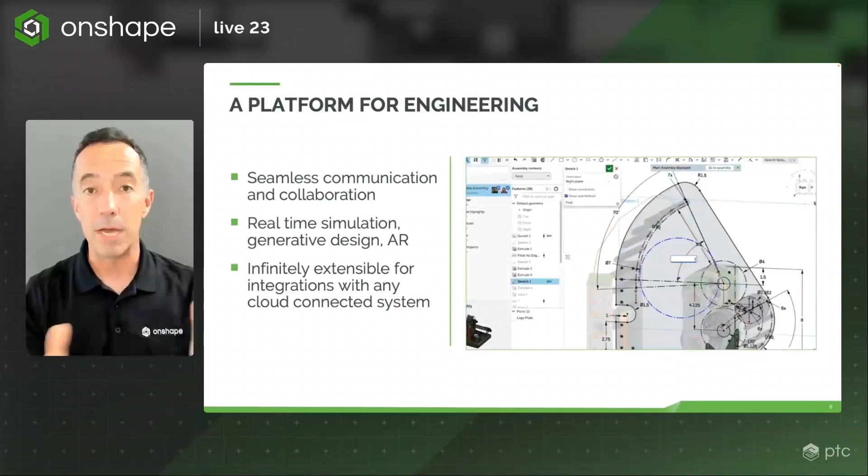But what I saw when I was a teacher is that it goes even beyond that. If you are creating a project of any complexity, or if you're doing research of any depth, you're quickly going to run into the constraints and boundaries of your CAD system. And so your designs end up getting constrained, and you end up having to adapt to your CAD system, because CAD systems, until something like Onshape, were not flexible or extensible. But because Onshape is so infinitely extensible and flexible, it adapts to you, not the other way around.

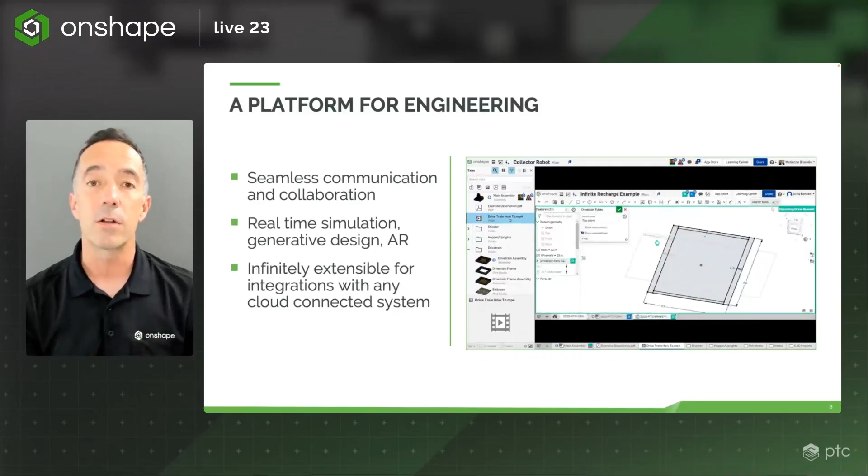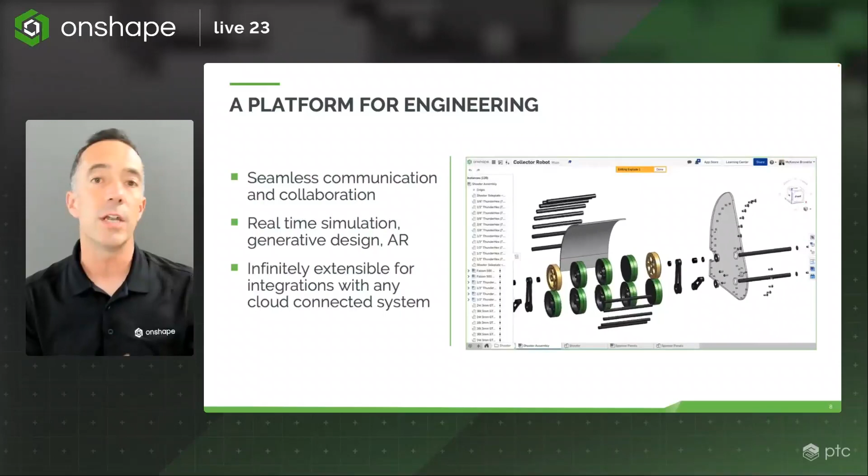And when my students got that, I really felt like their creativity was unleashed, because they understood that they weren't bound by the constraints of whatever CAD system was in front of them, that they could add to Onshape, they could find extra plugins, they could write or find extra scripts, and really it enabled a whole other level of creativity, of collaboration, and fun in the classroom.

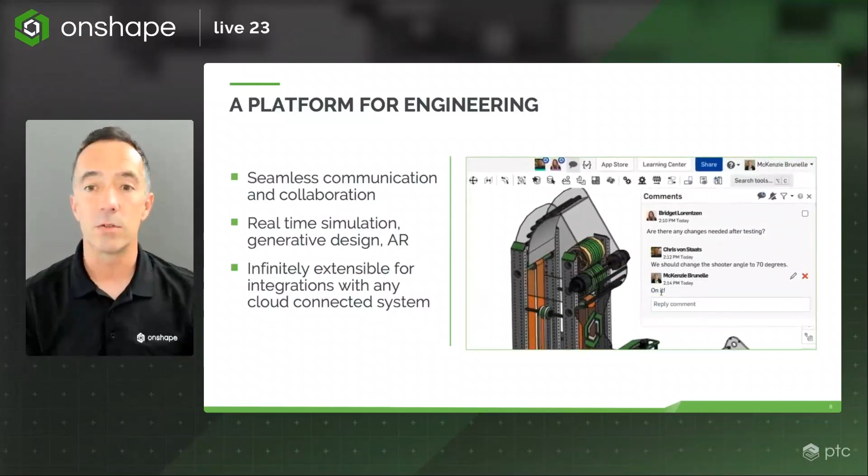So it's really cool to see a platform like Onshape that enables that kind of creativity, because it's so flexible and so extensible. So I'm going to turn it back over to Matt, and he's going to talk about some of the things under the hood that make that type of flexibility possible.

Thanks. So yes, I'm about to dive a little bit deeper into some of the core technologies that are really enabling this academic research and innovative teaching. So a first question that Onshape developers had to ask when they were building their platform was, how do you parametrically design 3D geometry in the cloud? Their answer to this question actually solved a couple of problems posed by traditional CAD platforms.

So let's say you're at the hardware store and they're out of the original material that you were hoping for. So you want to edit the model on your phone and update the bill of materials. In the past, traditional CAD platforms have been able to provide CAD viewers on your phone, so you can view and rotate your model, but you couldn't actually edit or interact much with your model from your mobile device.

Another scenario is you want to automate a common design workflow that your engineers are going to do over and over again, but you want to maintain a custom interface for parametric control. In the past, you could develop a macro to execute a series of canned tasks within your CAD platform, but you would not have a parametric interface for controlling this macro.

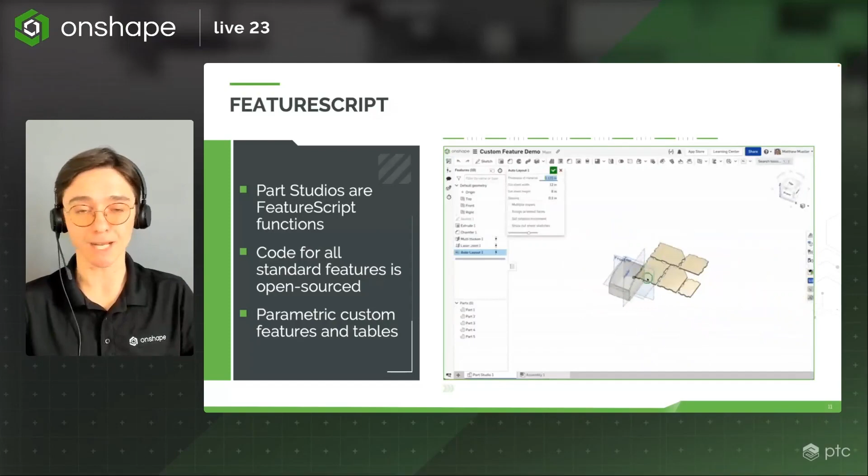One of my favorite things that you can do is now develop these custom parametric features and tables. So in this GIF on the right, you can see I have this 6-sided extruded shape, and with just 3 custom features, I can go from that extruded block into a flat packed box that's ready to send to my laser cutter and manufacture. And with each of these custom features, I also have a parametric interface to control, in this case, how many tabs there are on each face where they interact. So this is opening up a whole new world of how you can create your own first-class features in a CAD platform.

So a next question that Onshape developers asked was, how do you integrate CAD with other systems in real time? So one example use case is you want to pull a range of configurations with different parameters into a simulation and run that simulation to see the impact as you edit your model. So in the past, if you had a very powerful workstation, you would be able to do this, but there would still be a very manual process for data management where you would have to make sure as you edit your files, you're saving them and then reloading them into your simulation platform.

Another scenario is you want to integrate your CAD data with a project management tool. Jon Hirschtick this morning mentioned a number of examples like Airtable, Asana, Google Docs, that are all cloud-native project management tools. In the past, if you wanted to integrate your CAD data with those project management tools, it would, again, be a very manual task where you would have to upload any updates anytime you do them.

So Onshape's solution was the REST API. So if you're not familiar, a REST API is a standard HTTPS protocol that's used by pretty much all web applications. And it allows you to integrate any computational workflow, any workflow that's driven by code, directly into Onshape's modeling engine as well as database. So this allows you to, in real time, as engineers are working through the front end of Onshape, be running a Python script in the background that's doing any sort of data integrations or analysis or updating to organize your information, all in real time. So this is a hugely powerful part of Onshape that's opening up so much extensibility to make Onshape truly an engineering platform, so much more than just CAD.

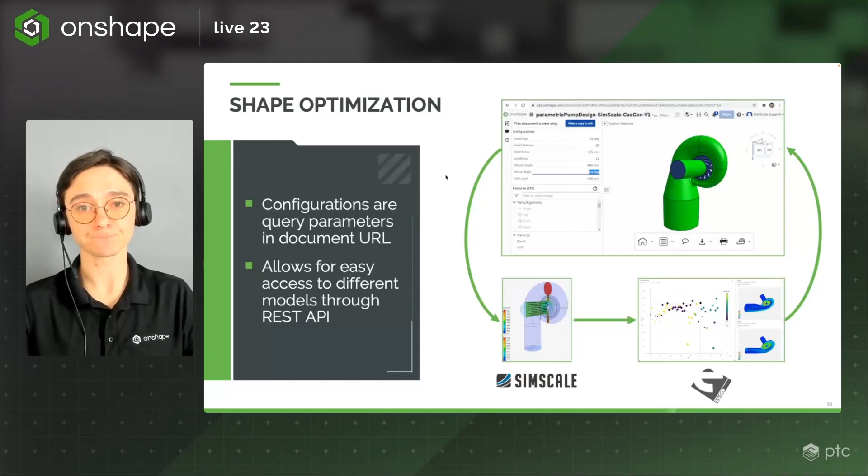But then you can change some parameters so that as the material is deformed in the y-axis, it also deforms in the x-axis with a negative Poisson's ratio. We worked with this student to develop a Python script to automate his process. This is a great quote where he says, using the Onshape REST API, I was able to cut my workflow from a very manual process on the order of hours to an automated and importantly rerunnable process of minutes. This lowers the costs of performing studies significantly and has vastly improved the fidelity of my investigations.

It's so exciting to see that Onshape is being used to grow knowledge in various communities. This was a great, fulfilling case where we were able to help a PhD student save lots of his valuable time. Moving on to the design process and education research community, this is a great example coming out of a collaboration between the University of Toronto and the Technion University in Israel.

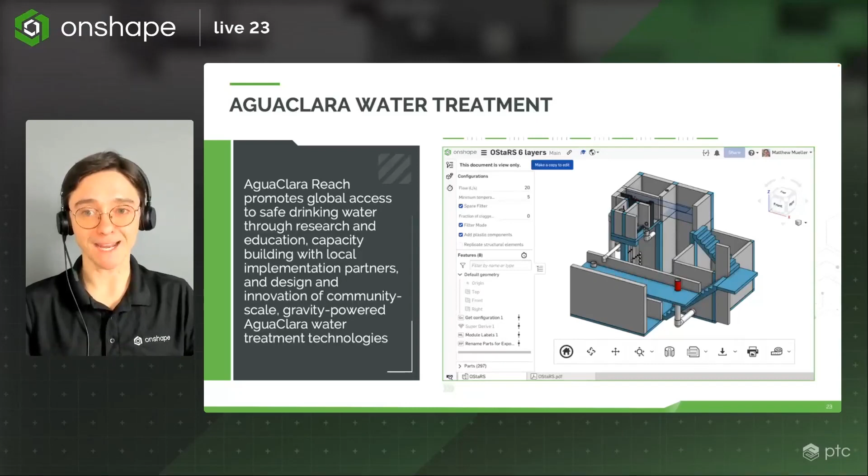So hopefully you were inspired by some of this very exciting academic research leveraging Onshape. But now I'm going to turn it over to Matt to talk through some great examples of ways educators are using Onshape.

Thanks, Matt. Yeah, I'd love to highlight a few examples of how Onshape's open architecture, just like we saw some exciting and innovative ways that it enables some really fantastic research, also enables some innovative teaching.

For starters, I want to talk about coding. Now, when I was an engineering teacher, I wanted my students to develop expertise in a wide range of disciplines in order to become successful engineers. I wanted my students to be well-versed in physics, electronics, design, and CAD, and coding was definitely one of those disciplines. I tended sometimes to teach those things in sort of siloed units of study.

Now, with Onshape, because it's such an open platform, it also helped me open up how I did some of my teaching. Coding is a great example. I wanted my students to learn coding. They had just finished becoming familiar with the basic modeling and 3D modeling in Onshape. Why not use that same platform to teach code?

Now, as Matt just described, FeatureScript underlies everything that goes on in Onshape. So when you create just a simple sphere in Onshape, you're writing code. Why not have the students open up the hood and see how that works? The script you can see on the screen right now is just 40 lines of code. And in those 40 lines of code, we're generating 125 spheres of 125 different colors.

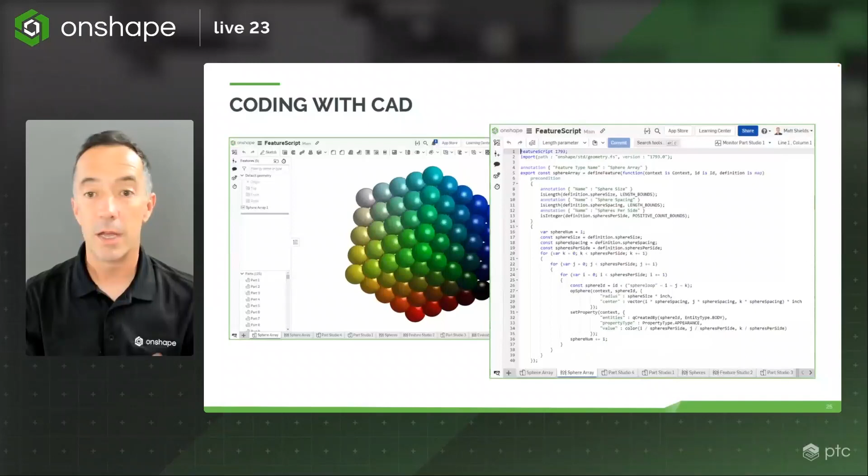Often when you're modeling in Onshape, you might run into a point where you say, this is pretty tedious or maybe even impossible with the built-in functions - why don't I write my own? Students can start becoming familiar with that process.

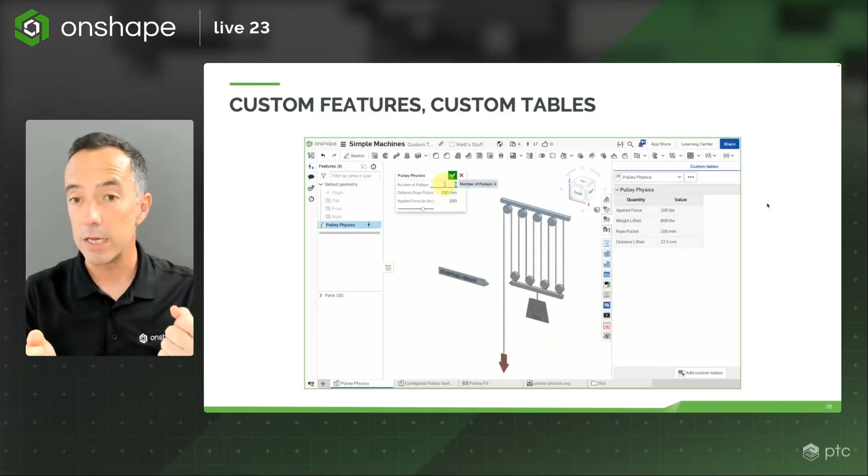Students can experiment with the model, change various inputs, change how many pulleys there are. They can pull on the rope and see how much the pulley blocks move. They can adjust how much force they're applying to the rope and see how much weight they can lift with that force. All of the data is collected in a live table on the right called a custom table. So students and teachers work together generating a CAD model that lets them simulate and demonstrate physics, run an experiment, collect data, and draw conclusions. It's a great example of using FeatureScript to blur the lines of disciplines in the classroom.

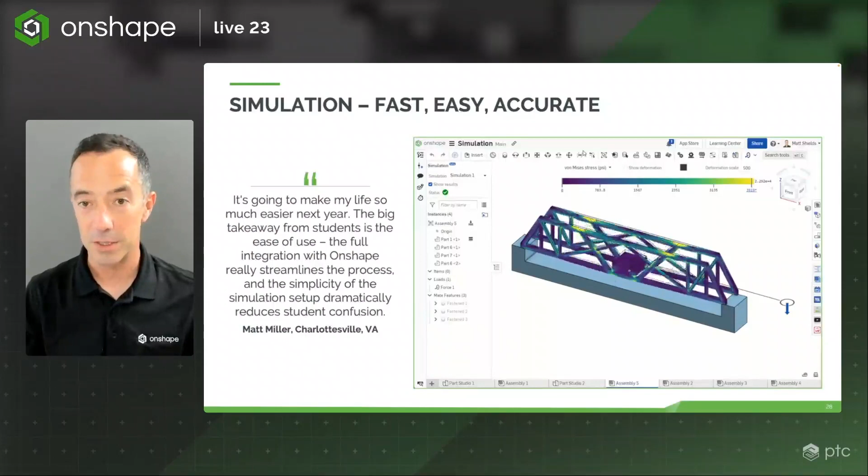But getting to the final step of actually doing simulation and testing on it, he couldn't get there because it was another program for his students to learn, and that was a bridge too far, if you will. But with Onshape simulation, the students were already modeling their bridges in Onshape, and then with a click of a button, Onshape is able to do some real fast, easy, and accurate simulation and speed up the iterative process. And because this bridge was for competition, students could do better in their Science Olympiad competition that they had coming up.

All right, the next example I would like to talk about is a custom app, not a custom feature. We've seen that because Onshape is built on an open language called FeatureScript, you can write your own custom features using FeatureScript. Now, custom apps take advantage of what Matt talked about earlier, the REST API. Because Onshape resides in the cloud, it can easily connect to any other cloud services, and this has an endless number of advantages, including creating your own custom apps for your own specific purposes.

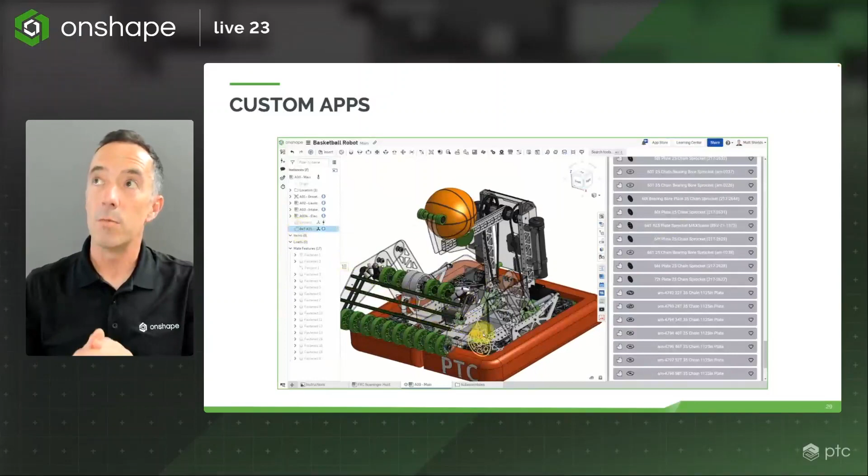On the screen right now, you can see that someone is building and designing a robot. Now, a lot of times when you're designing a robot, most if not all of your parts are coming off the shelf. So if you're going to be designing your robot using off-the-shelf parts, you might be stuck either modeling all those parts from scratch, or scouring the internet looking for the various off-the-shelf parts that you need for your robot. You might be looking at different vendors, and that's a really time-intensive process.

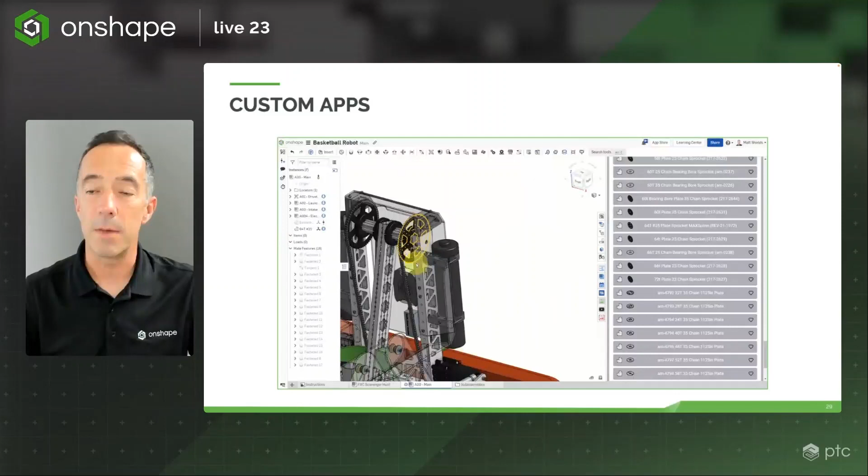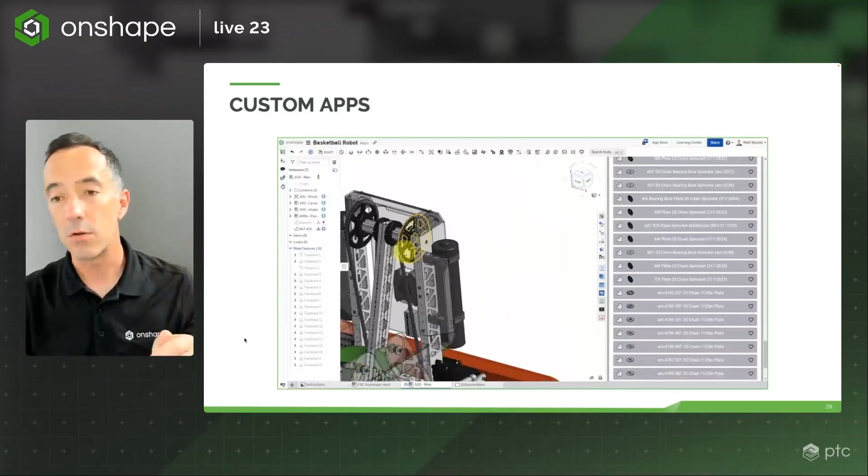This custom app actually goes out onto the internet and keeps a database of various vendors and various parts, dramatically speeding up the process of modeling and designing the robot. So this robot is made almost entirely of parts pulled in using the REST API through a backend database, presented in a nice right panel app to the user. The user can grab parts, model it in, and keep going. It's a really slick interface.

Let's take a look at one more custom app. This was actually designed by some students at Tufts University. I love this relatively simple but real deep example of what you can do with custom apps and the REST API. So we've got a relatively simple 4-bar linkage designed in Onshape, those 4 bars all modeled with different links. And we want to create a kinematic study.

We want to see what is the output of that kind of right orange pin when I take the left input through 360 degrees. What's going to be the output? That is actually not by default possible in Onshape. So the students wrote their own custom app. The app, as you can see, takes the Onshape model and modifies that mate that causes the left leg on the left to go through 360 degrees in 8 steps.

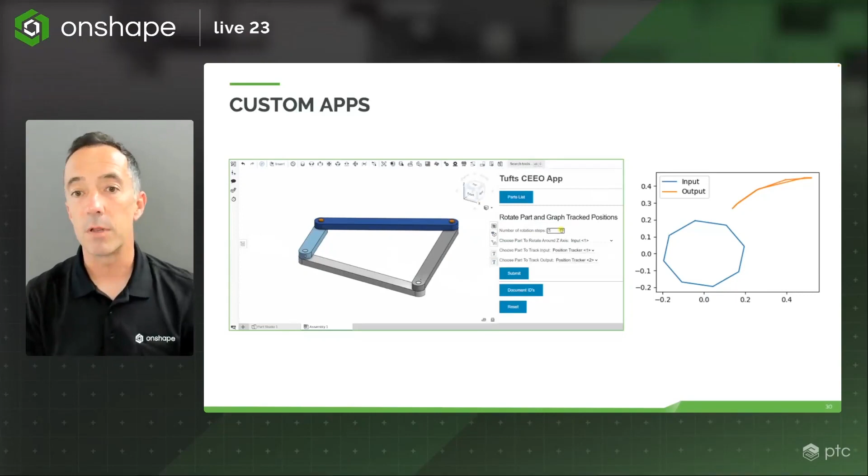That's a variable in the app. It goes through 8 steps and it goes through 360 degrees. Then the resulting geometry is captured by the app and plotted using a simple Python plot. So if you want to know, given those 8 rotations, what the orange output is going to be on your 4-bar linkage, write a custom app, send the bar through the rotation, gather that data, and plot it. Really great example of writing a custom app.

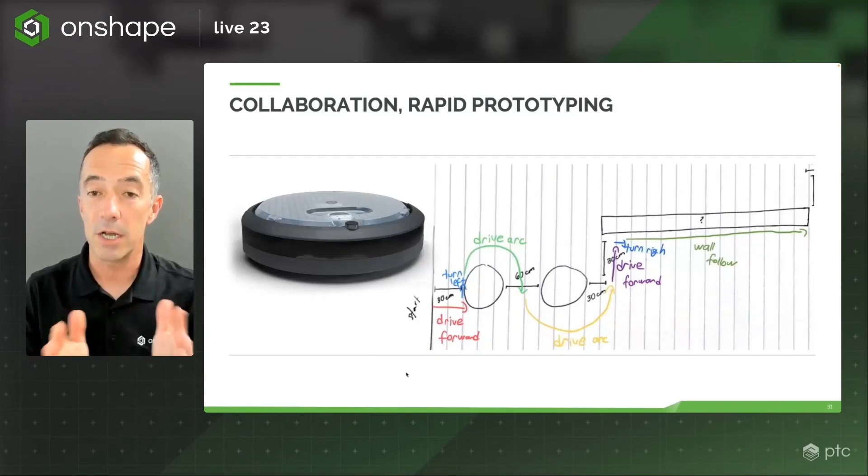That is a challenging project right there by itself. But as the robot heads down the wall, it also has to joust a competing robot. So let's take a look at one example solution that these students were able to come up with.

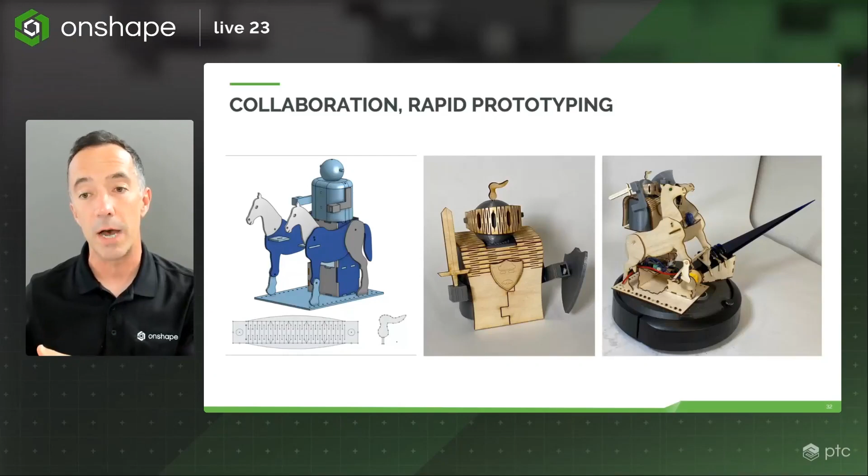On the far right, you can see that they actually embedded a fair amount of electronics in the final design, that the horse actually galloped, his eyes lit up, and there were a couple motors and a microcontroller all embedded in this system. And one of the things I like about this project is this is just a one semester project that students also had other things going on, and they were able to generate a fairly complex and creative and ultimately successful robot using Onshape. And I think a big part of it is how Onshape enables collaboration and that rapid prototyping process.

So you can see in this final image that Sir Mr. Potato Head successfully navigates the course, travels down the straight line, and is able to be victorious in the joust. Now, clearly, these students learned a lot about design, about collaboration, and about robotics in this process. But I think you can also tell the students definitely had fun in the process. And as a teacher, I can tell you that if you can have the time and the tools to embed a little bit of fun in the process, that's going to go a long way toward achieving your learning objectives.

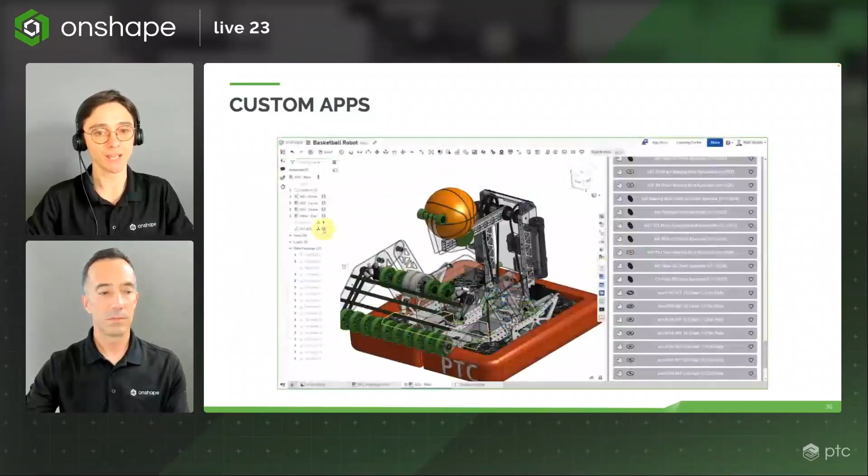And with that, I think we can hop into the question and answer phase. And I see that there's a lot of exciting questions coming in from the chat. So a first question was actually about the features that we highlighted while I was introducing FeatureScript. So I'm going to quickly hop back in the slideshow to show those 3 features. And Peter mentioned that there's also been a great discussion about the best ways of taking your Onshape designs and sending them to a laser cutter. So hopefully you have gained some insight and learned from each other about the best practices there.

So here's that example of going from this 7-sided shape into a laser cuttable object or design in just 3 features. So first we use the multi-thicken tool, which any face that you select will become its own part with a specified thickness. Then we use the laser joint feature, and you can specify how many tabs on overlapping flat faces you want. And then we use the auto layout custom feature.

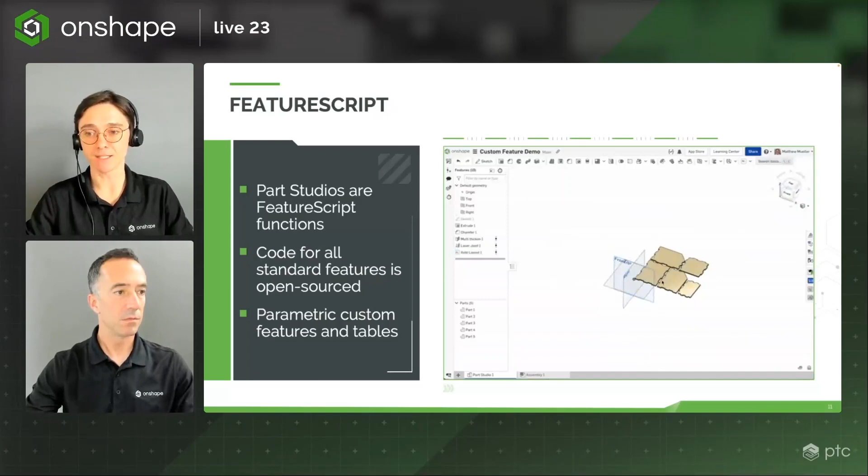So of course, the last step would then be, how do I get a DXF or SVG of that flat shape sent to my laser cutter? Unfortunately, there's no one solution because each laser cutter is so different with what they require. So my solution is typically to create a new sketch and use all of those faces, which I can then export as a DXF, which my Glowforge accepts. But we're happy to work with you to come up with a best solution if that doesn't work for you.

I see another question was about the pulleys custom feature. Matt, I'm not sure if you have that link handy or are able to pull it up quick. I can pull it up real quick. What was the question about the pulleys?

So I think I misread the question. I was pulling up the spheres, yes. I'm creating a public version of the spheres document as we speak. I'll also do the same for the pulleys, and I'll drop a link in the chat.

Awesome. On the fly, agile in our questions during Onshape Live. I love it.

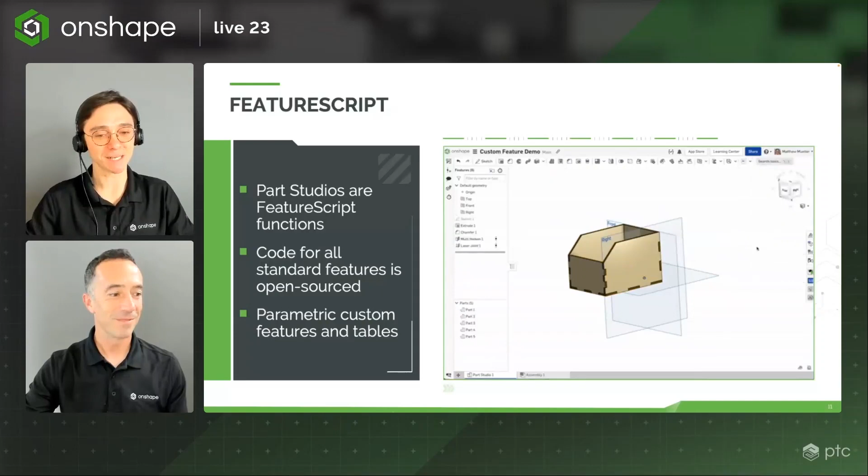So we've gotten a couple of questions that I think are related to the REST API. One question from Mohammed was, can Onshape create unique identification from parts of an assembly itself? This is something which I think is not used or considered in other software. And then we had another question from Abduziz about using Onshape for machine learning. And both of those, I think, are most closely related to Onshape's REST API.

So you can use the REST API with any coding language that you're familiar with. Python is a popular example, one of my favorites. And to answer that first question about assemblies, yes, you can get information about your assemblies, about the geometries and their relation to each other directly through that REST API. So you can go to Onshape's developer portal and learn a whole lot more there.

And taking that one step further, researchers are using this for machine learning. So there's a great example of a paper from the University of Washington called Automate, where researchers built a huge data set from Onshape assemblies, from public documents, and they were able to generate a smart mate tool that would predict where the mates should go given the geometries that you imported into an assembly. So long answer, but the short answer is yes, there's lots of exciting ways for Onshape to be used for machine learning.